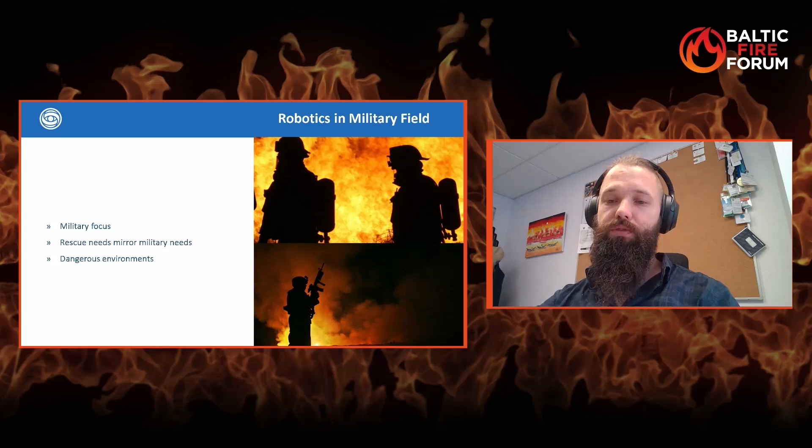So we also need to take people out of harm's way in military scenarios, gather timely and relevant information, and just make better decisions. We are pretty much operating in hostile and inhuman environments. The main focus in all of those aspects is still to bring humans out alive, so saving humans is critical in all of those scenarios.

So, a few words about Milrem. Our mission is to provide innovative robotic solutions for challenging environments. We believe that our cutting-edge robotic solutions fulfill a higher purpose, enabling more meaningful lives.

And in 2019, we released our first rescue product line.

So our customer portfolio - we mainly have military clients. That's NATO countries, 7 of them, and also in Asia we have a few countries that are our clients.

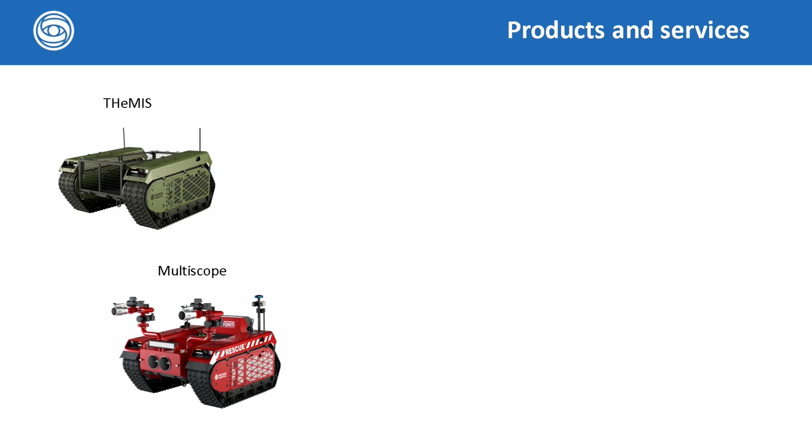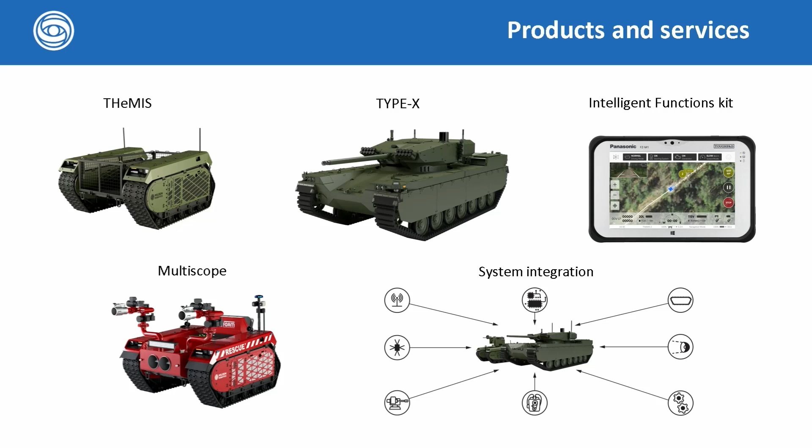We also have an intelligent functions kit, which is a package that includes necessary hardware and software to modify any vehicle to give it unmanned control and safety functionality. And the last thing I want to emphasize is that we specialize in putting different types of systems together. For example, with THEMIS, you may want to insert a different platform and have it work together with troops - that's 3 different systems working together, and that's something we do as well.

So now let's go deeper into the rescue field.

Our main partners in the rescue field have been the Estonian Rescue Board, whose input has been invaluably valuable for us, and they're widely recognized experts in extinguishing fires, and also our payload provider, Innofoam from Netherlands.

So here is our main platform, the Multiscope, and now we will go see how it's built up and what it does. It's a diesel-electric hybrid.

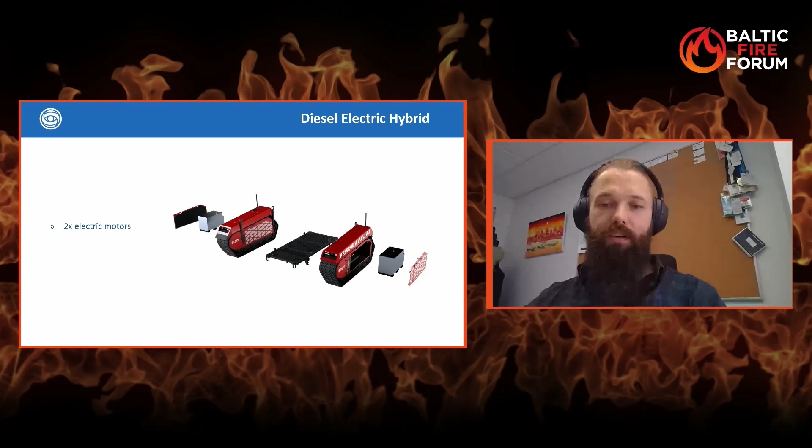It has two electric motors located in the front of the track. The vehicle always uses electric motors for driving. It has a battery block, and the diesel engine on the right side is continuously charging the batteries. So the runtime for this hybrid solution is up to 15 hours.

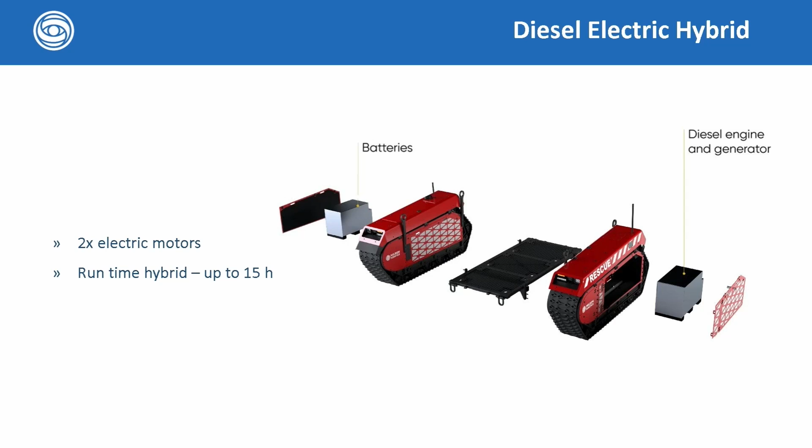Now you will see a video of the capabilities of the UGV on terrain.

So let's now unpack a little bit what you saw. As you can see, the vehicle is really capable - it can drive up to 20 kilometers per hour, and the maximum towing speed is also quite high.

Even with its small size, it has a lot of different advantages due to its weight. The nominal payload is 750 kilograms, and all the specs remain achievable with that. However, the maximum payload is 1.2 tons. It can cross water obstacles as deep as 60 centimeters. As you saw on the video, we tested a Mali deployment where we pulled a 32-ton armored vehicle.

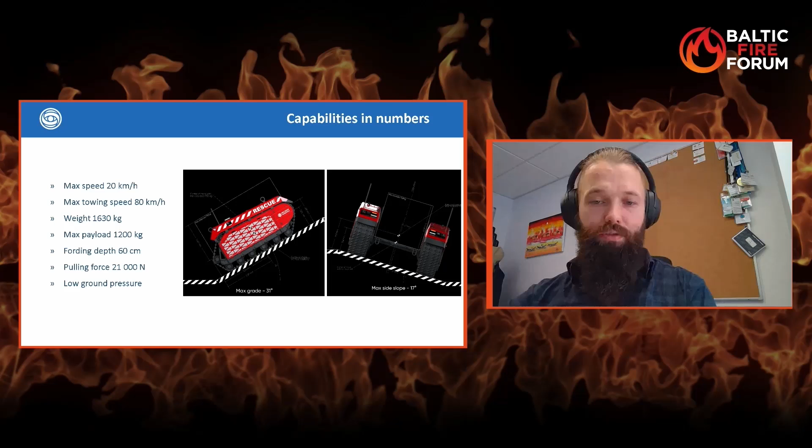And also, due to its tracks, it has very low ground pressure.

Another important aspect to understand is its modular architecture and design. The center frame is adjustable, so the ground clearance is adjustable, and the only thing actually connecting two modules is a cable - there's no mechanical connection between the central platform. That enables us to customize the measurements of the vehicle as needed for the customer.

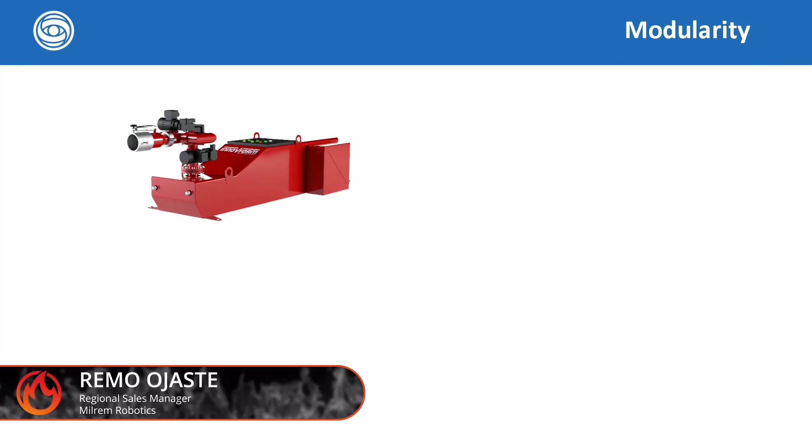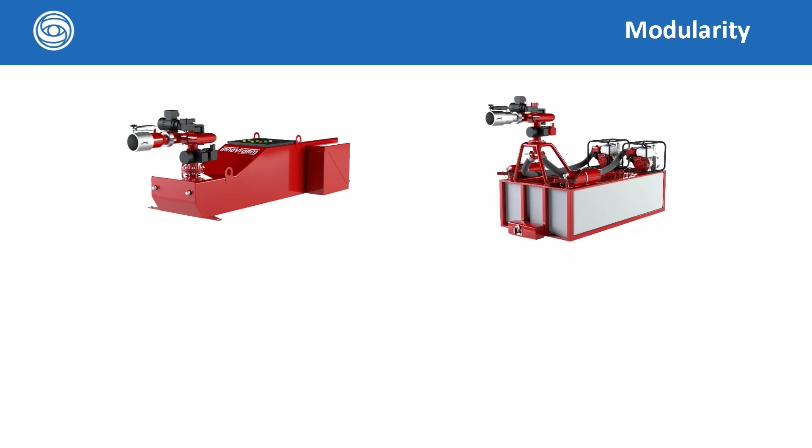Another cool thing is that you can add different types of payloads and increase the capabilities. For example, you can add fire monitors with different power supply, and replace a water tank with a fire monitor. Also very helpful for firefighters would be a hose laying system and a system that you can carry and collect.

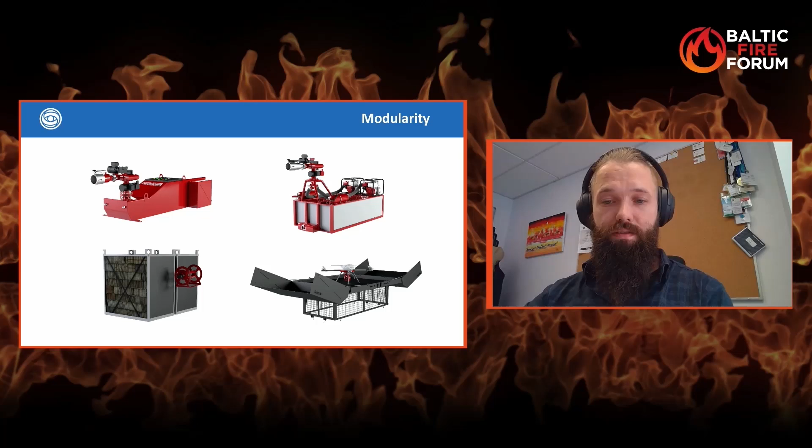And in the picture you can see the additional hub for a tethered drone, for having, for example, an 80-meter-high observation point or to relay radio communication. So the flight time for the drone is basically unlimited due to the tethered version.

Also, it's really easily interchangeable - it only takes 5 to 10 minutes, depending on the procedure, to release it and put the new payload on.

So taking all of those things into consideration, you can see that there are a lot of different options. This is the kind of product family we are dealing with at the moment, and in the middle is the newest one, called Hydra.

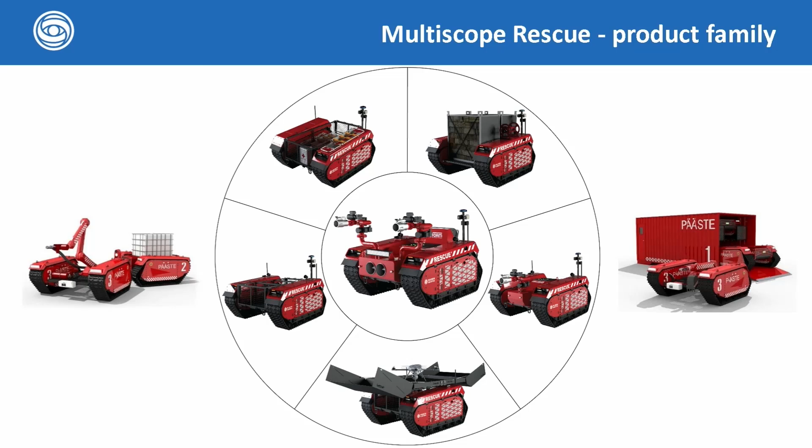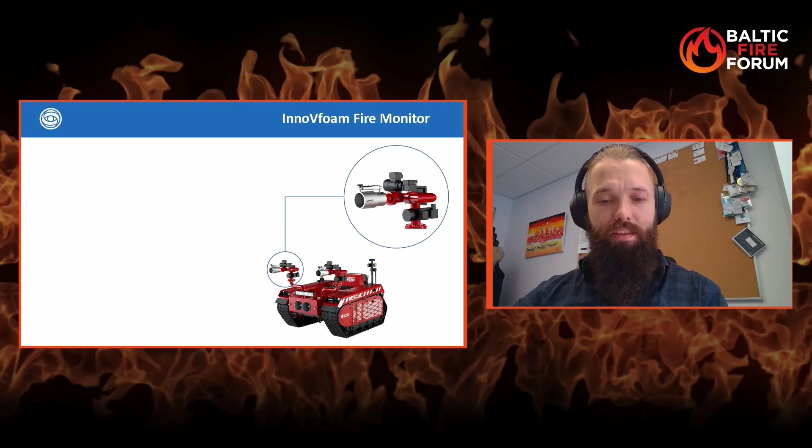But during this time we have evolved a lot from duct tape, and we actually have a real solution right now, and it's called Hydra. We will go and look a bit deeper inside that as well.

So first, we're going to talk about the fire monitor. It can supply up to 3,000 liters per minute, but it's adjustable. You can change the fire monitors to lower ones and to bigger ones if needed. It has a 360-degree maneuverability.

It's radio controlled, and it can use water and also foam. Depending on the pressure of the water, you can extend the throw length up to 62 meters. But if you change the fire monitor to a more powerful one, the throw length can be even further.

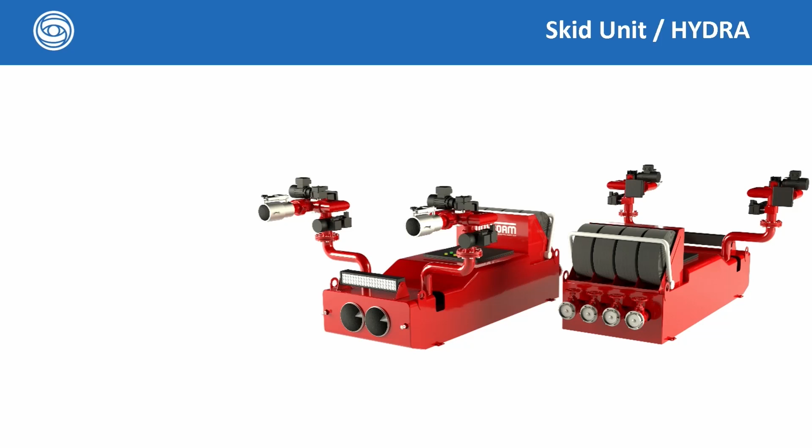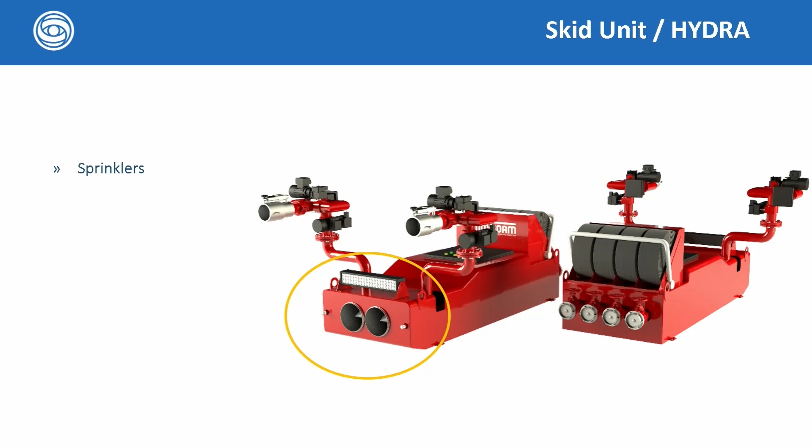Now let's look at the bottom part of the Hydra, the skid unit. In front, you can see there are two sprinklers, which are meant for cooling down the front side of the vehicle. In the middle is the control unit that does all the decisions between the radio and the fire monitors. There are 4 fire hose compartments and 4 hose connectors.

In the front, there is an expansion generator for creating a foam blanket, and also there is an extra light source just to give some extra lighting on the scene.

It's also easily transportable, and due to its small weight, it's portable even via air. This would significantly reduce the reaction time for actions that are far away. You can also attach it to the truck. It's a really easy solution, and for small distances, this is a really fast option. But if we start talking about longer distances, then it makes sense to put it on a trailer, so you will be reaching the accident site faster.

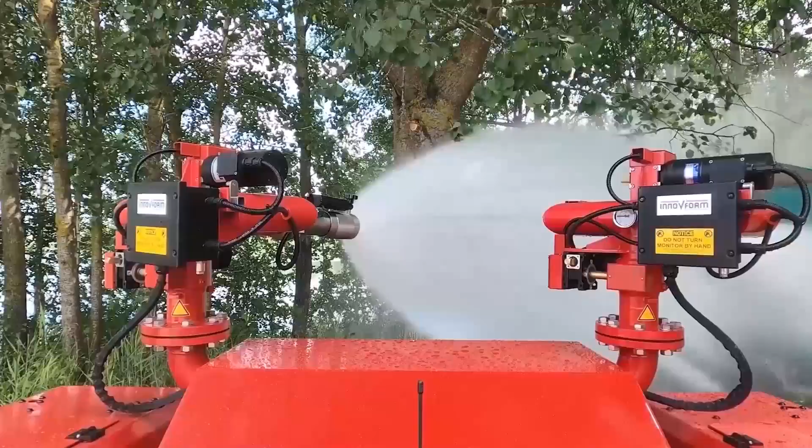Now we're going to look a bit into experience and use cases that may come up. For firefighters, the overall bigger concerns are that the environment where they need to work is rapidly changing and the structure is new, and there may be some new danger zones that people are not aware of.

Also, different types of gas tanks, especially mobile ones. From time to time, it happens that there will be an accident, and it can become a disaster really easily when we're not able to get close enough.

Also, as I mentioned before, the military polygons with unexploded ordnance. In the summertime, sparks can easily happen, and big field fires can come out from that. So it's really important to mitigate and act fast on those occasions.

It will be very useful for unmanned vehicles with low ground pressure to extinguish those situations as fast as possible. Also related to the previous point, in a dry season, small sparks can become disastrous in the forest area, and there is a lot of manpower and resources needed to mitigate those.

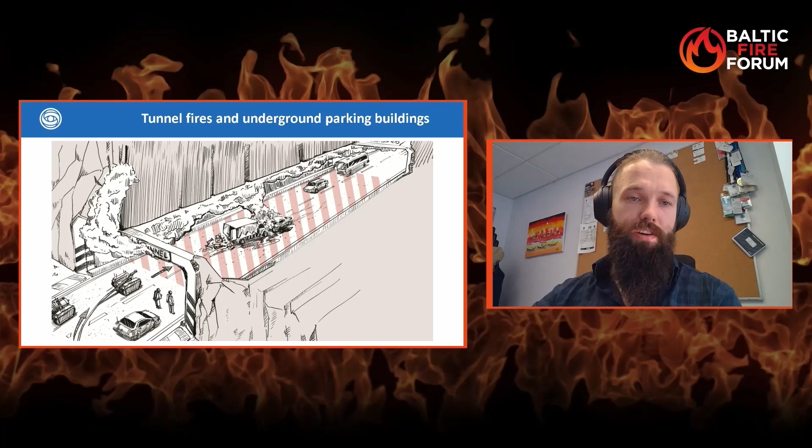Also, another big place where things happen is tunnels - tunnel fires and underground garages. For one example from Switzerland, about one mile from the exit, there was a car accident, and it got filled with smoke, with numerous casualties. In this situation, UGVs could be used to bring in big ventilators, or even just keep the temperature down, and send the vehicle in to get access to real feedback from the accident and get better intelligence, so the firefighters are able to react better to the scene.

Also, the last use case would be a disaster relief scenario, where UGVs could help carry a big load of equipment closer to the disaster site, because resources in that kind of area are always limited. The UGV is a perfect choice because you have one vehicle for several functions, and can do a lot more than just transport the goods.

This is actually how we provide innovative robotic solutions for challenging environments. And I would really like to thank Baltic Fire Forum for this opportunity, for letting us participate, and hopefully we were able to add some value to this event.